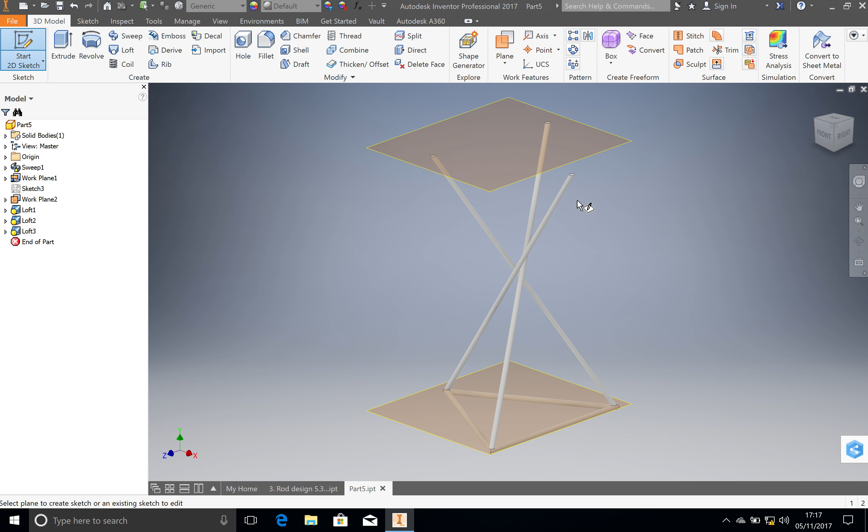Once you have all three rods complete here, we want to now put an area for the candle to sit on top of these rods here. So we're going to start a 2D sketch and put it onto this level here. You can either do that by clicking on the side of this work plane or by clicking on one of these circles, because they're both at the same height. I'm just going to click on the work plane there.

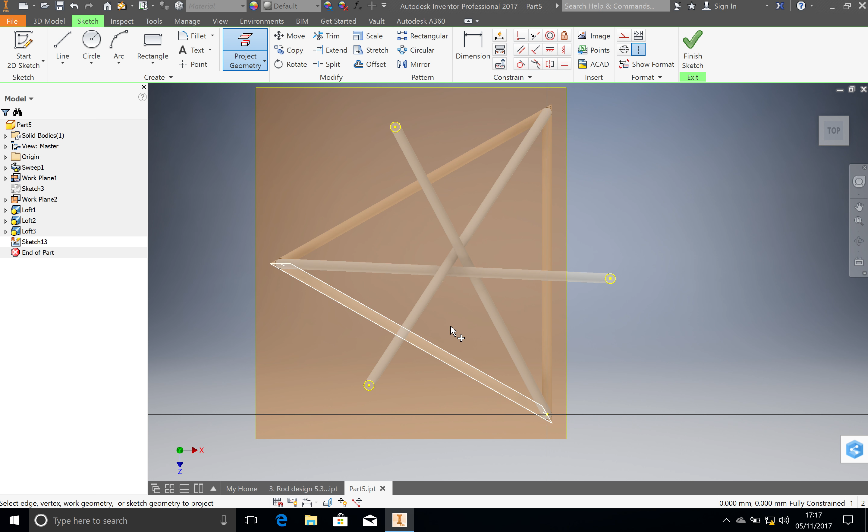Now we want to draw some circles on the top of here, and the easiest way for us to do that is to project geometry of these circles. So we're going to click on that circle there. So having clicked on this button here, we're then going to click on each of these circles. Okay, that takes the circle from another place and puts it onto our sketch, as you can see we've done there. We are then going to put a circle.

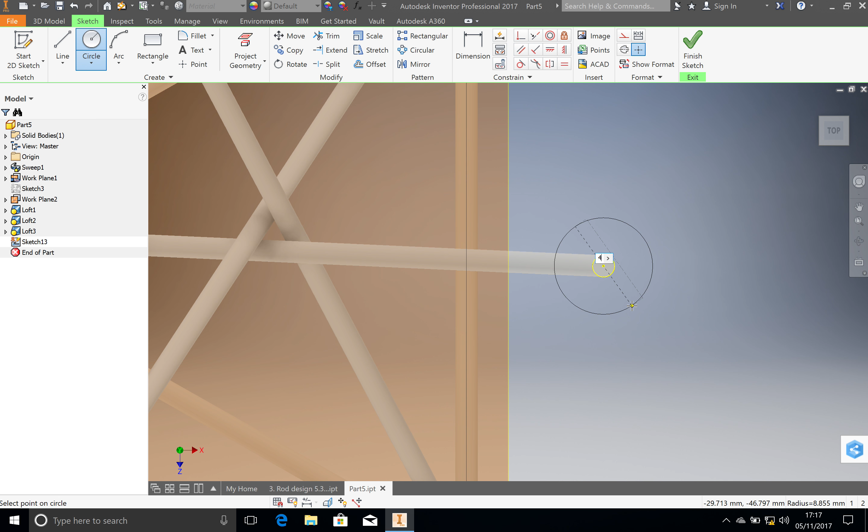Now you could draw a circle, we want it to be 24 millimeters, by just clicking on the circle tool. Now you've projected geometry onto the center of that circle. We can click and bring that out, okay, and we want that to be 24 millimeters. You could do it that way, or if I just go back, a better way for us to do that is just to use the offset button, click on this and bring it out by 20 millimeters.

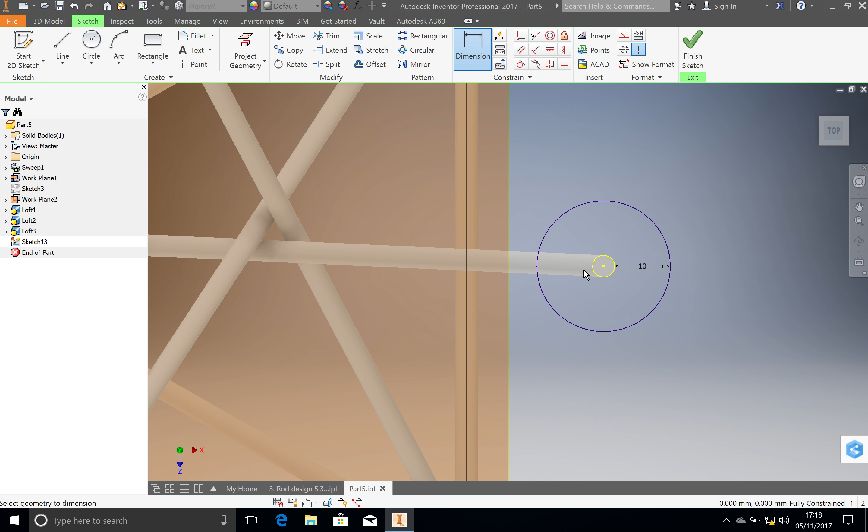So actually that should be 10. So I'm just going to dimension that back down to 10 millimeters because we're talking about radiuses here. So 10 millimeters here, 10 millimeters here, plus the 4 of that makes 24. Okay, so we're going to do that offset. So click on the offset button, come out like that, and hit 10 millimeters on each one of these circles. Out it comes like that by 10.

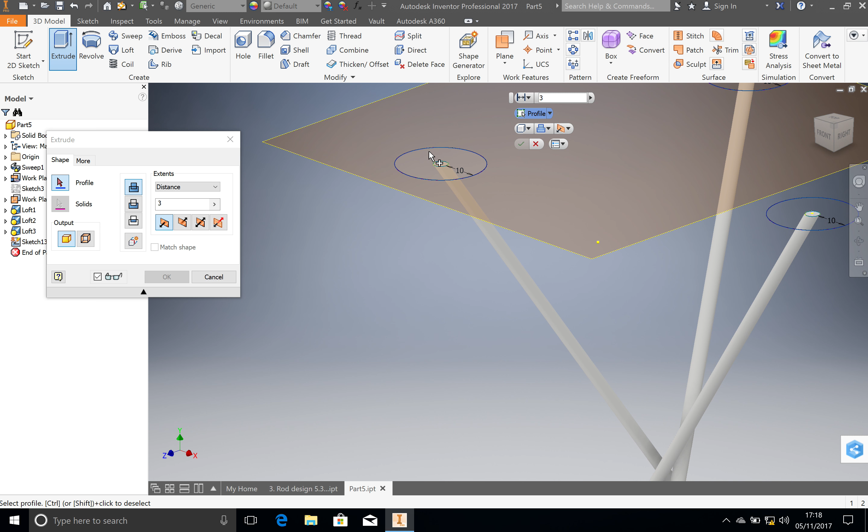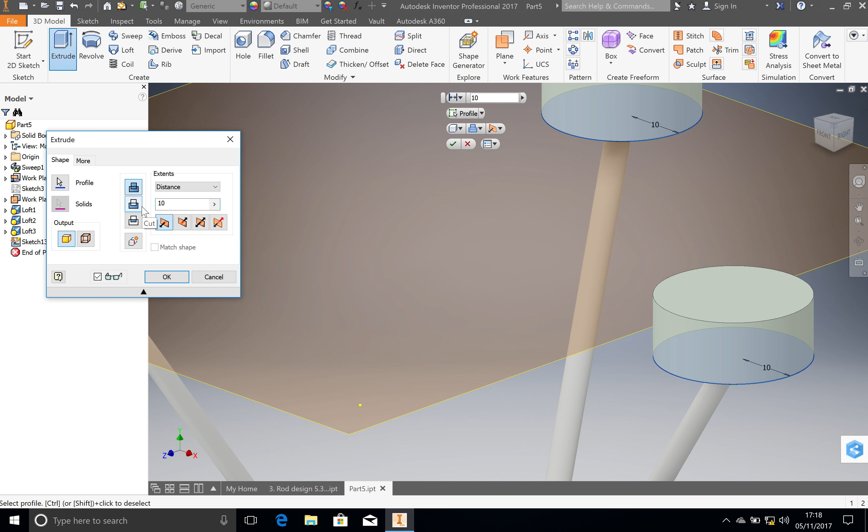Then finish your sketch. Then you want to come in and extrude. Now click on the extrude button. You want to select the inside part and the outside part. Now your dimension, it will probably start at 10 millimeters. Mine's doing it by 3 because I've just done something else by 3, but it may automatically extrude it by 10. So yours might look something more like that, where we want to select it down to about 2, and you change the dimension at the end once you've selected all of these areas.

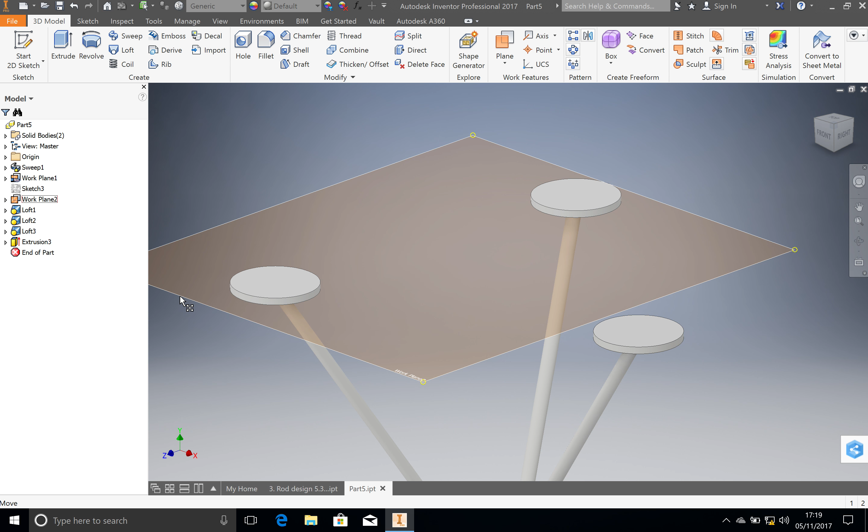Now it's very important that you click on the new solid button. That means it is a new type of material. It is different to the rods which are below. So we've done that. You can then come to the edge of this work plane, right click and turn off the visibility.

Next we want to start a new sketch onto the tops of those circles. I'm just going to zoom all to bring it all in a line. We're going to project geometry the outside of those circles again. 1, 2, 3. Okay, that's with this button here. And then we are going to just offset this by 2 millimeters. Okay, and that will give us an inside ring of 20 millimeters. Okay, so I've just offset each of those circles by 2.

If you wanted to check the dimension of one of these inner circles, you could click on the dimension tool and then just click on that inner circle, and you can see it's 20 millimeters as I wanted. If you do end up clicking, it will give you a warning that you need to accept because we've already dimensioned it. We're dimensioning it again, so it has to be 20. So yes, we accept that.

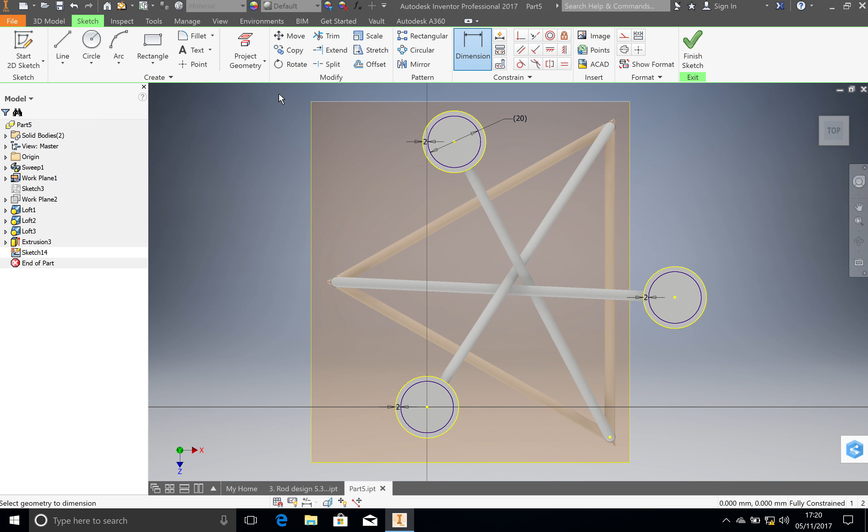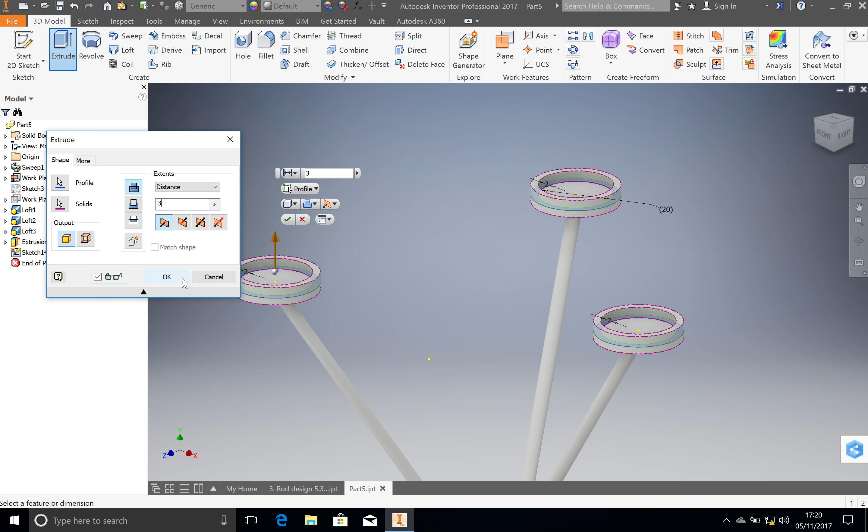Finish your sketch, and then you want to extrude just the outside circles here, and you'll want to extrude those by either, well, I've said they're acrylics, so they're going to be 3 or 5. That's the width that we have them in. We're going to say 3 millimeters. And importantly, again, they are a different material to the one underneath. If I fail to click new solid, look what happens. It considers it all one material.

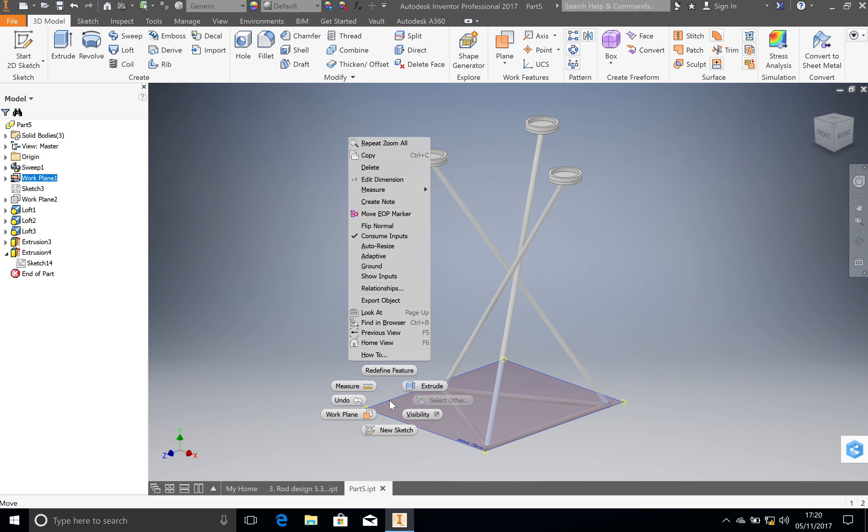If you do forget to do that, just come back to your extrusion, double click on the icon. We're back to where we were just a minute ago. Then click on new solid, and you will see that's how we want it to be. 2 separate materials. And there we have finished the part. We're just going to right click on the edge of this work plane and turn off that visibility.

It's always important, I think, to make sure that you've got your front correct. That looks fine to me, or we may have it round this way. Okay, they all look slightly off. I think that should be the front, so I'm going to right click on the house there, come down and set current view as front.

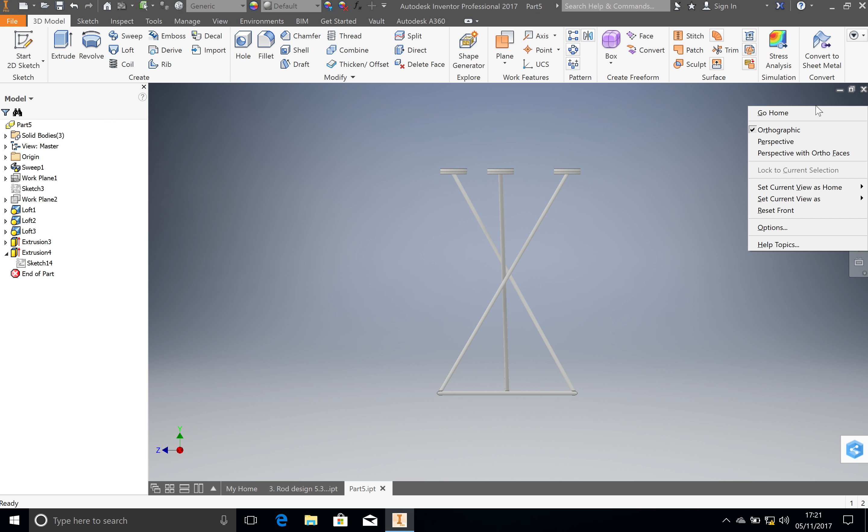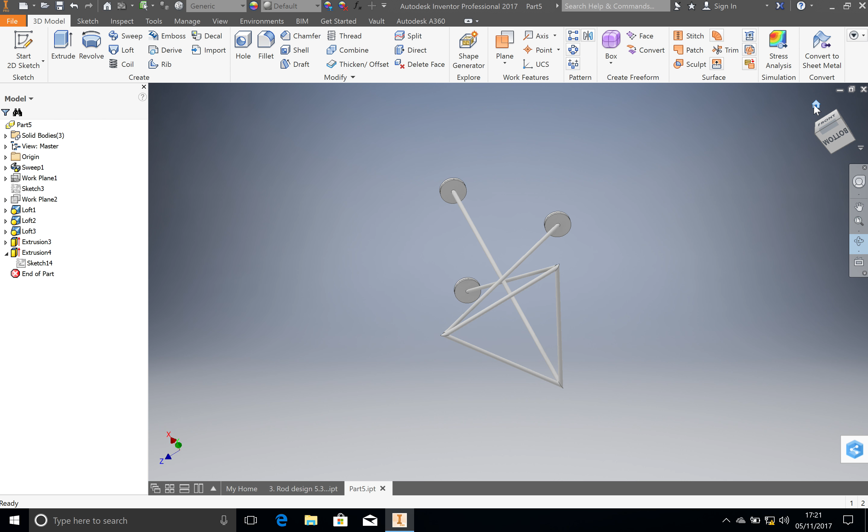Okay, then I'm going to just click in this top left corner there, and that puts it into a nice isometric view. So I'm just going to come up to the house now and just right click on that and set the current view as fit to view. Now whenever you rotate this around and you just want to go back to that view, you just click on the home and it's there. Make sure you save your work.